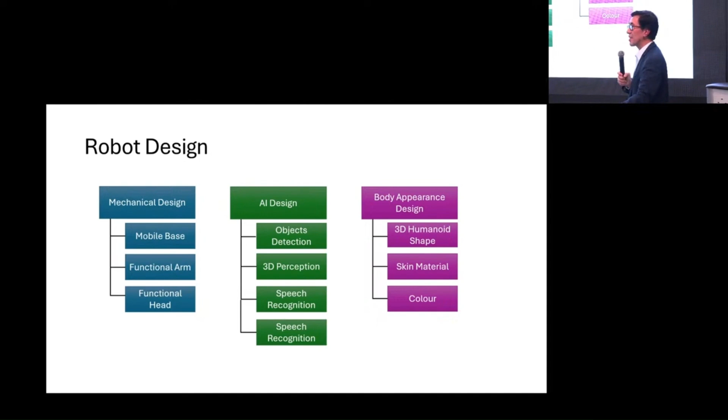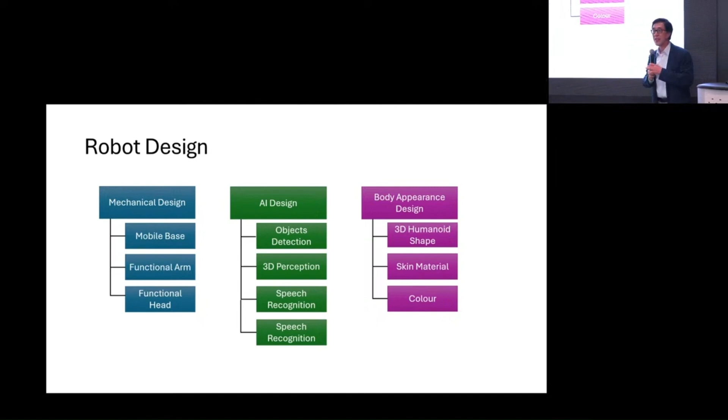And then finally, we have to have a good body design. Make it humanoid, it's a very important part. Whether citizens like to talk to this robot depends on the appearance. We don't want them to feel afraid of the robot. They should feel it is friendly and like to talk to him. So we have been thinking about, should it be more cartoon style, or very real human style? We discussed a lot, the skin materials and the color, to have this final design. So let's look at that one by one.

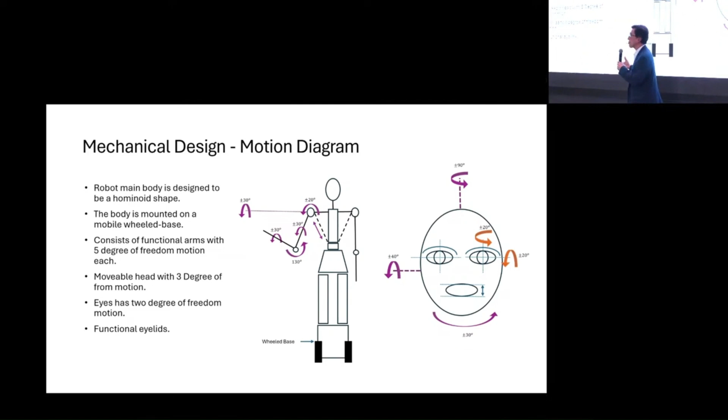So the mechanical design is also based on a lot of discussion with the city. We came up with the acceptable freedom and flexibility the robot should have. They expect the hand can move with 5 degrees of freedom, so the hand can shake hands and point to directions. The head, they want to have eyes on the head. The eyes should be able to rotate a little bit, more like a human. They thought that would feel more comfortable to the visitor. The head is able to rotate a little bit. And then instead of legs, we have a base. So this is the mechanical design requirement.

Yeah, so it's important. We have to make sure when we discuss with the city, right? We don't want the robot to be too noisy. We don't want people scared. It has to be very quiet, stable, smooth. So when we talk to people or guide people to different locations in the municipal building, they feel comfortable. So there are a lot of criteria we have to make sure it runs in this way.

Yeah. Yeah. Okay, so feel free to take a look after this. I think you can use it. I think then just put a coffee on the top, and it can bring the coffee to him.

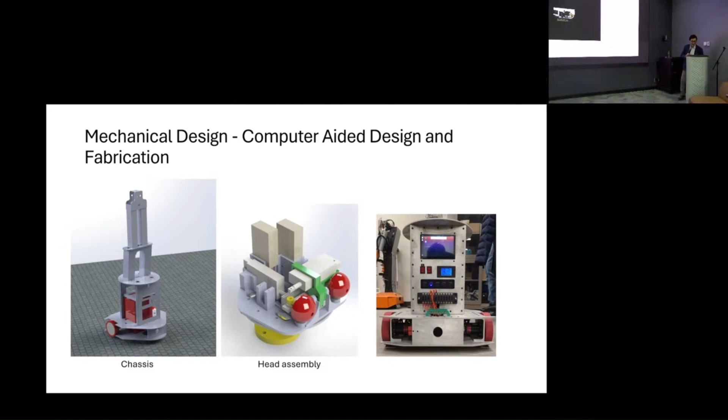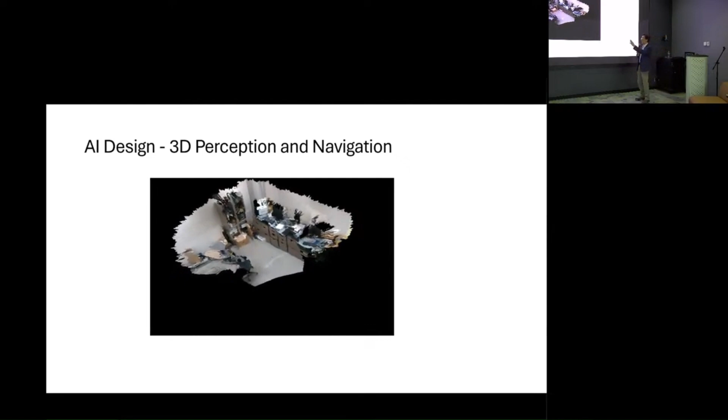Yeah. Well, this is the mechanical design. The next part is the AI, okay? So this is something we put more research, more novel stuff, right? It is innovation, right? So we have to do some 3D perception, okay? We only have a camera, so we need to use some AI to generate the 3D environment, okay? So this is generative AI. So we can create a 3D environment from the camera, so the robot can smoothly navigate in those conditions.

Yeah. The video is too long. I think we can just stop here.

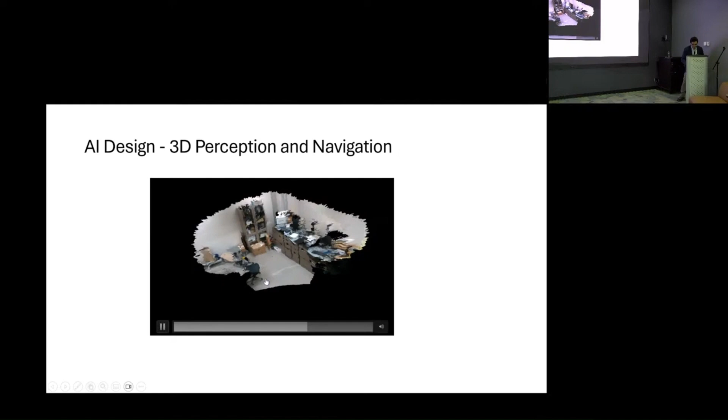Well, as you mentioned, right now, besides moving, we expect it to be like a human, right? So it can detect objects. Okay, so we already designed the robot. We have a very reliable detector, already trained, ready to put on the robot. So it can detect humans, okay? We can also use it to count how many humans. If the city needs that, they can also use it to find some missing person, as long as you give them the picture of that person, okay?

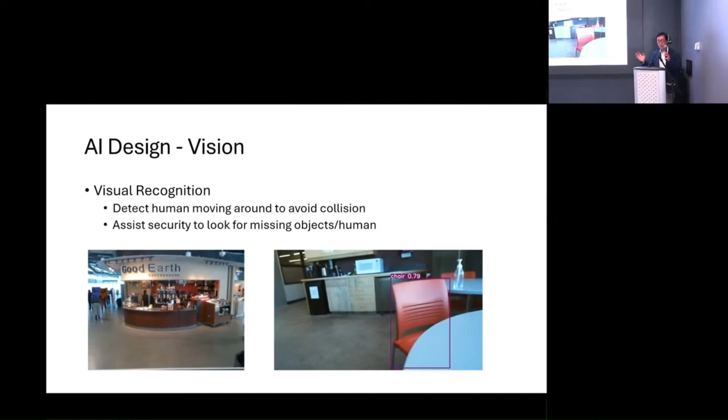The other function, not only humans, the eyes can also find objects. So if some visitor says, oh, I forgot my cell phone, I lost my jacket, then you just tell it, and it can go around to search for different types of missing objects. And then it can send it back to the reception office or security. So this is one function we'd like to have in this robot.

Okay, and the next part, besides the eyes and the motion, we also expect one important thing: the AI needs to talk to people. So the robot can have continual communication, explaining responses from context for each individual. So it needs to be able to answer different types of questions. Not only one answer; if that person keeps asking, it needs to keep responding, okay? It's quite difficult sometimes because lots of people may be talking. So we also need to prepare to handle those situations.

Okay, so the setup should be completely offline. This is the requirement from the City, because maybe we could connect to the internet, but they don't want that. They said they want it to be isolated. They don't want to connect to any central server. They don't want to record any citizen voice for security purposes. So they want everything local in that robot. So that's causing quite a bit of work to get it done. Potentially, they want multilingual support. If people speak a different language, it can also translate and explain to that person.

Okay, so this part we had difficulty with. When we first started, we were developing a speech recognition system, but in the middle of that, ChatGPT came out. Well, that changed things completely. All the things we did before were not compatible with ChatGPT, so we had to switch to using a large language model, okay? But the challenge is the large language model is pretty large, right? So it usually runs in the cloud. But because of the second requirement, we have to put it on the local computer.

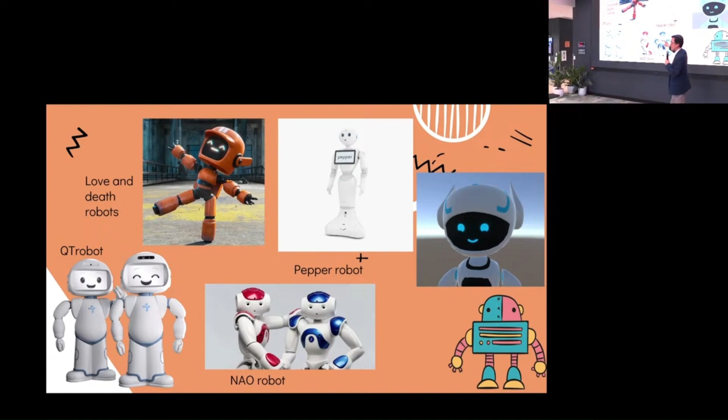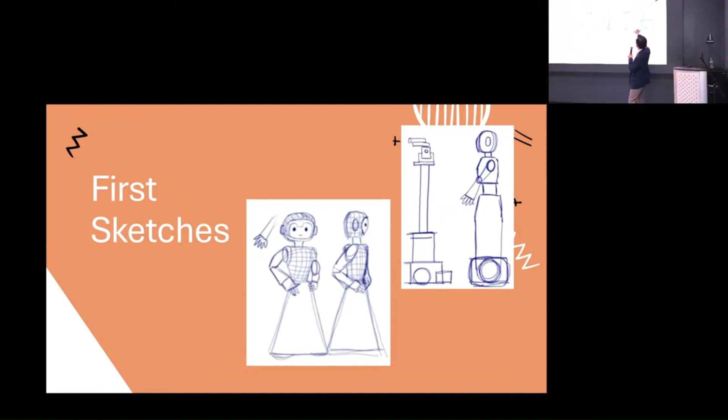So they looked for different types already in the market, in the business. So I think that's where they started from. And then they started sketching based on the requirements the city would like to see. More friendly, humanoid type, but not too human. So they have different sketches of different types of robots.

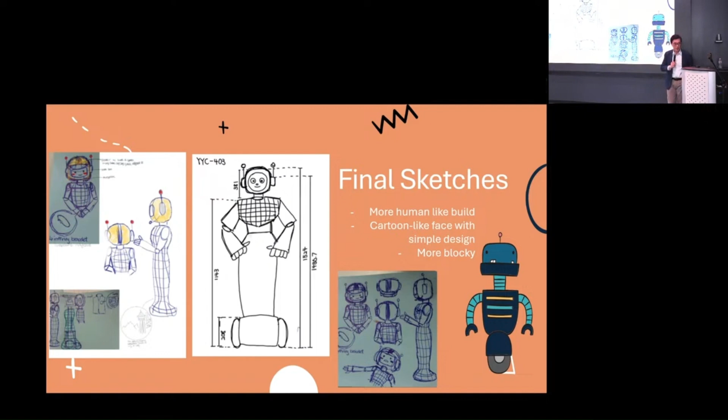So they thought this should be a more human-like build. They think it should be a cartoon-like face with simple design. We don't know why, but they said it's good to be more blocky, okay? So I think maybe this younger group likes to see that. Okay, so then they use the software. The high school students designed that because we don't want to make it look too human, too scary.

Yeah, I see. So then they used the computer software to draw the design. So that would be what the robot looks like eventually. You will see it in City Hall someday. It would be like this. The base is like that. So this is the wheel, this is the body, that's the hand, and this is the face.

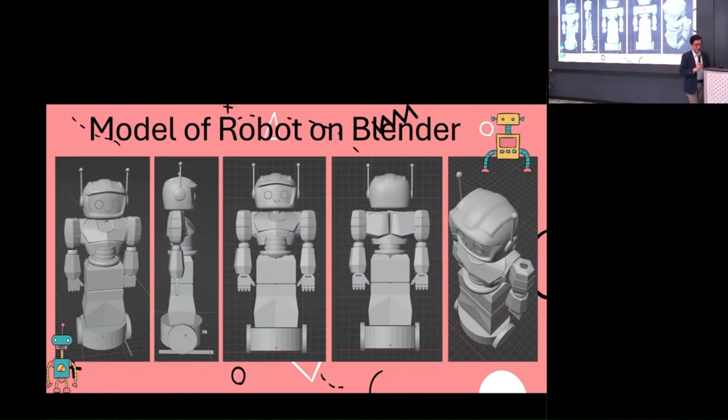And the team has some suggestions. On the base, they would like to put a painting like that to highlight this belongs to Calgary, because they're all born in Calgary, right? So they want to highlight aspects and buildings that make Calgary unique by incorporating a modern art form.

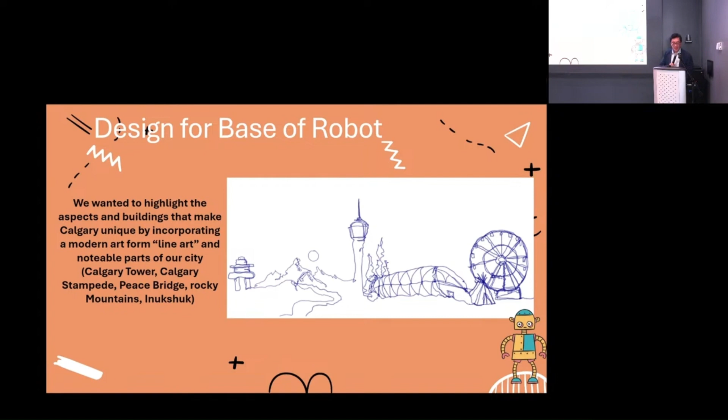And they also want to have a sticker design. They suggest incorporating some hand-designed sticker on the helmet to represent that this is our design, totally designed in Calgary, led by the City of Calgary. So we haven't designed that; we'll wait for the city to choose what they want to put as the sticker on the helmet of the robot.

So maybe Flames, maybe the Alberta flower, the maple leaf from Canada. It's up to the city group to choose, then we will try to put it there. Okay, so that covers the YYC robot project. Thank you.

Any questions? Yeah. It's moving now because originally we programmed this robot for City Hall. So when it's powered up, it's actually trying to scan the environment. You put a robot into a new environment, it's scared, it's shy, right? It's trying to find out what the environment is, where the wayfinding is.

So now once it's scanned, it starts moving, right? So that's why it took a little bit more time. Again, this is all learning. I didn't know this until today. So thank you. Any questions?

How did the project come about? How did the city and the U of C connect on this? We have some background. We have been doing quite a few robot projects. So I think the city contacted us.